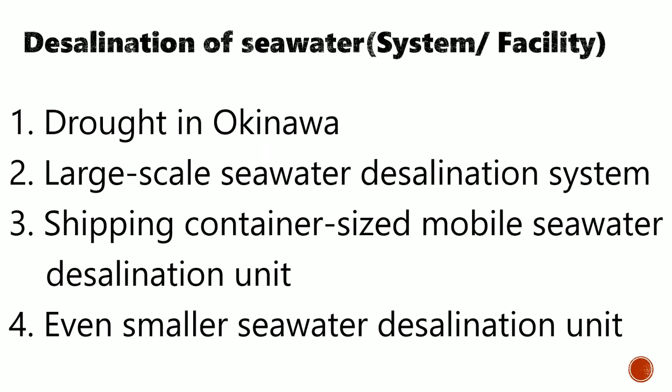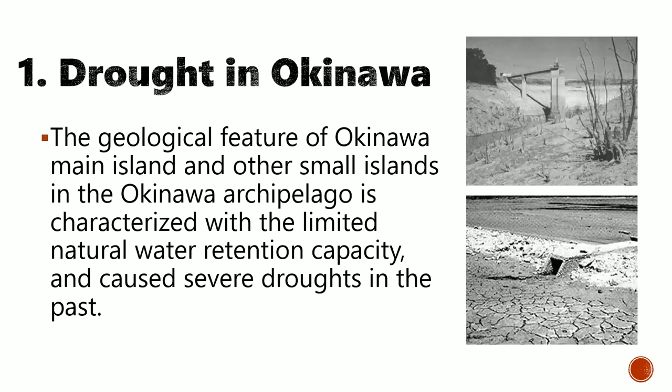1. Drought in Okinawa. The geological feature of Okinawa main island and other small islands in the Okinawa archipelago is characterized by limited natural water retention capacity, which caused severe droughts in the past. When the population was small, natural springs and wells at various parts of the region used to be sufficient to provide enough water.

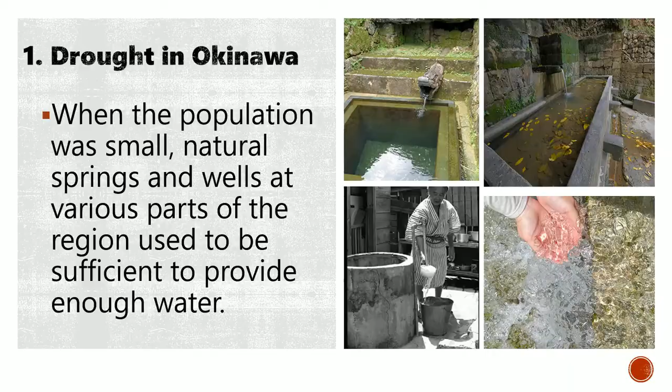However, the population of Okinawa steadily grew over the past. It was 167,000 in 1873, 572,000 in 1920, 1,107,000 in 1980, and 1,463,000 in 2022.

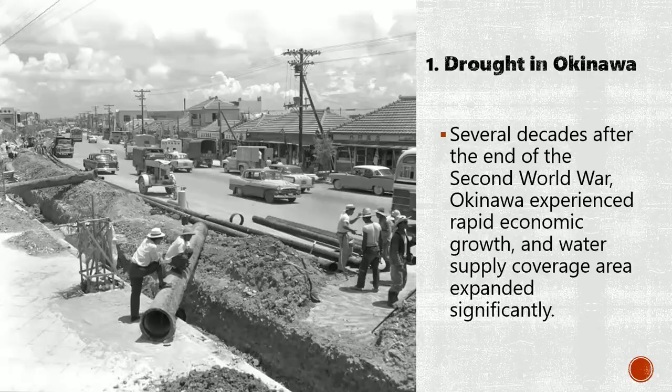Several decades after the end of the Second World War, Okinawa experienced rapid economic growth, and water supply coverage area expanded significantly. This resulted in increased water demand and chronic water shortage. There was even a year with almost no water supply throughout the summer.

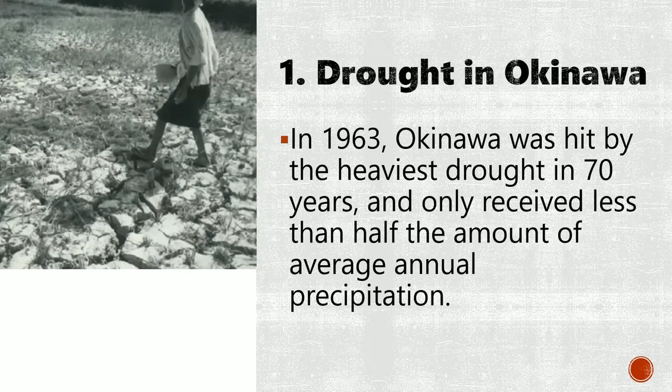In 1963, Okinawa was hit by the heaviest drought in 70 years and only received less than half the amount of average annual precipitation. The drought inflicted extremely serious damage to agricultural crops and even got the Japanese central government's attention. Extensive damage resulted in not only a long 206-day-long water supply restriction, but also crop loss, abnormal growth of insect pests, and starvation death of livestock.

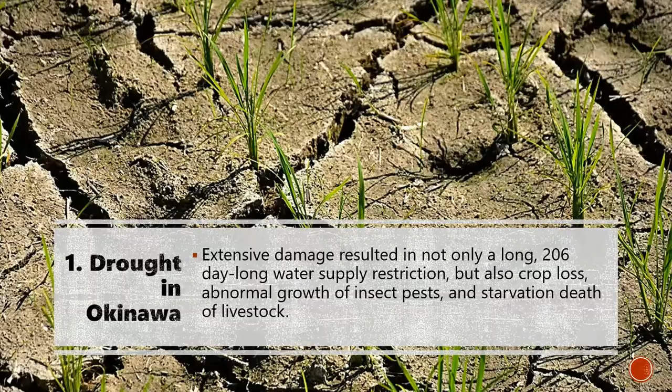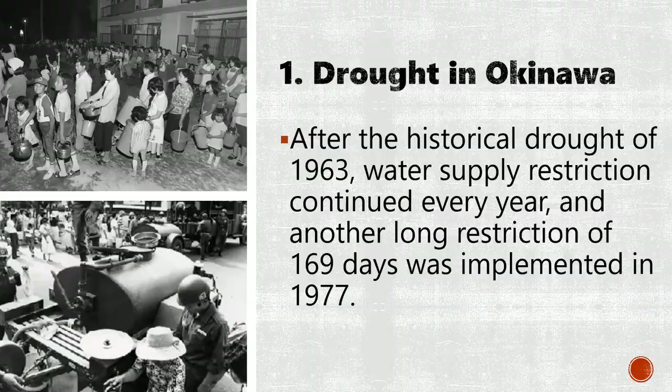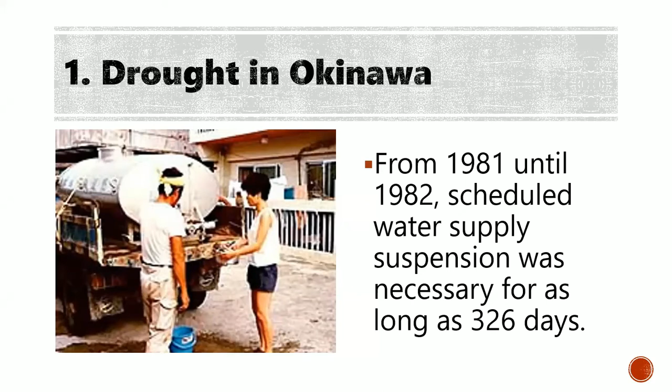After the historical drought of 1963, water supply restriction continued every year, and another long restriction of 169 days was implemented in 1977. From 1981 until 1982, scheduled water supply suspension was necessary for as long as 326 days. As you can see, there was a time when drought was a constant cause of worry in Okinawa.

Water use per person in Okinawa gradually increased year by year. Water demand further increased due to population growth, tourist growth attracted by booming tourism industry, and new resort hotel openings.

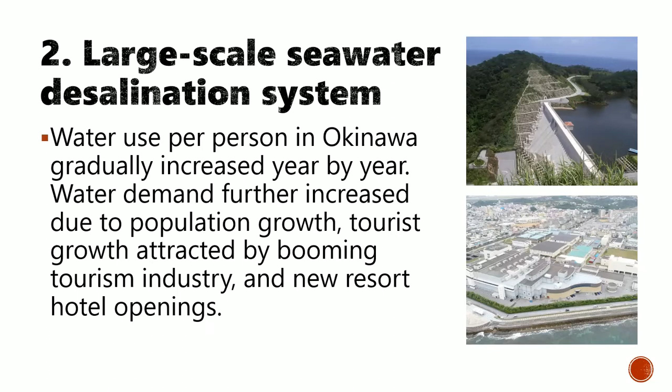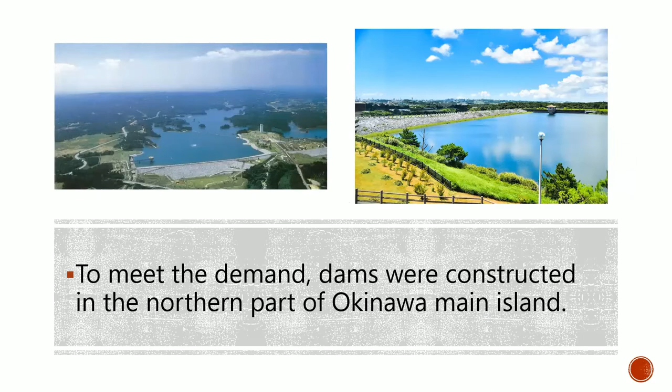To meet the demand, dams were constructed in the northern part of Okinawa main island. In addition, in preparation for the time of low water level in dams during drought year, a seawater desalination plant that can turn seawater into fresh water was constructed.

How to produce fresh water from seawater? Seawater has a salinity of about 3.5%. The technology of removing the dissolved salt to produce fresh water is called seawater desalination. The core of this technology is the cylinder called reverse osmosis membrane element.

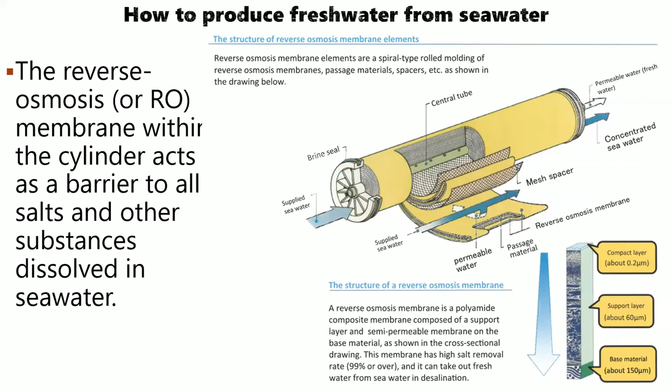The reverse osmosis, or RO, membrane within the cylinder acts as a barrier to all salts and other substances dissolved in seawater. By applying high pressure on seawater, only water molecules are forced through the membrane, thereby producing fresh water.

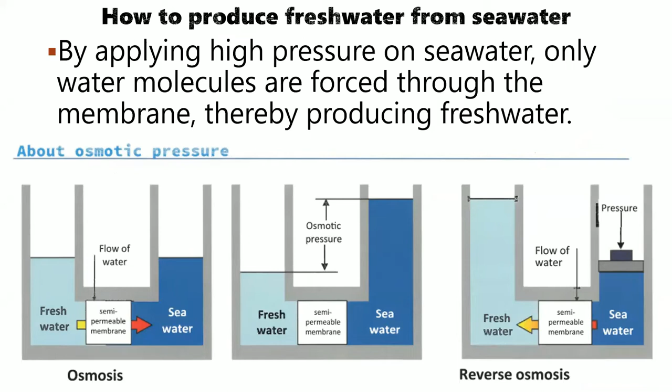Advantages of seawater desalination are as follows. 1. Stable production, securing water regardless of season or weather. 2. Shorter construction period relative to dams. 3. Smaller site area relative to dams. 4. Proximity to demand centers.

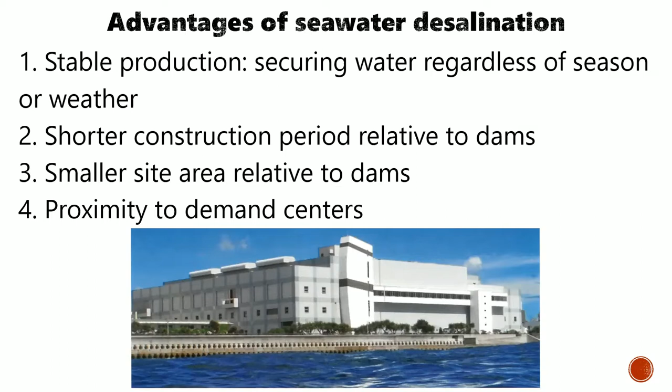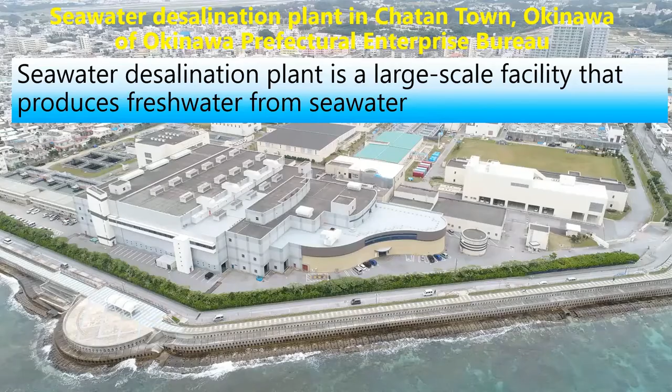Seawater desalination plant in Chatan Town, Okinawa, of Okinawa Prefectural Enterprise Bureau. Seawater desalination plant is a large-scale facility that produces fresh water from seawater. It has a production capacity of 40,000 cubic meters of fresh water per day, enough to fill a 25-meter swimming pool 160 times.

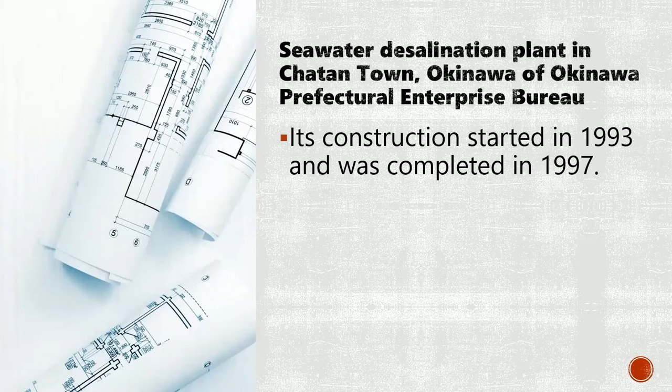The new water resource development project of introducing a seawater desalination plant began in 1977. Its construction started in 1993 and was completed in 1997.

Seawater desalination process at Chatan Seawater Desalination Plant. 1. Water intake: seawater is taken from an intake tower located near the desalination plant at a depth of 9 meters. 2. Sedimentation basin: remove sand and stones after letting them settle on the bottom. 3. Sand filters: remove fine sand, dirt, and turbid matter that came through the sedimentation basin.

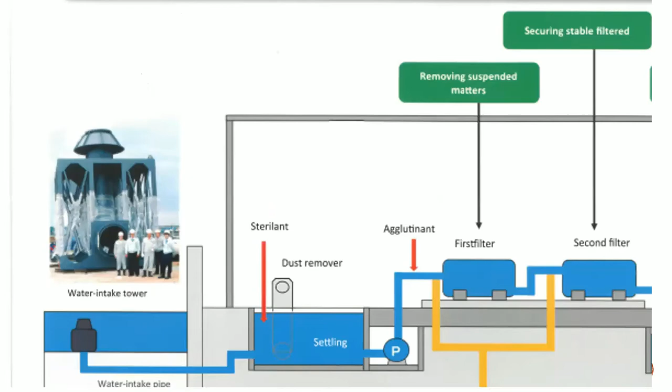4. Adjustment tank: temporarily store the filtered seawater. 5. Reverse osmosis unit: separate feed seawater into brine, or seawater with high concentration of salt, and freshwater. 6. Discharge brine to the sea from the discharge tower; meanwhile, send freshwater to Chatan Water Purification Plant. 7. Blend the freshwater from the desalination plant with purified water at the purification plant and supply to consumers.

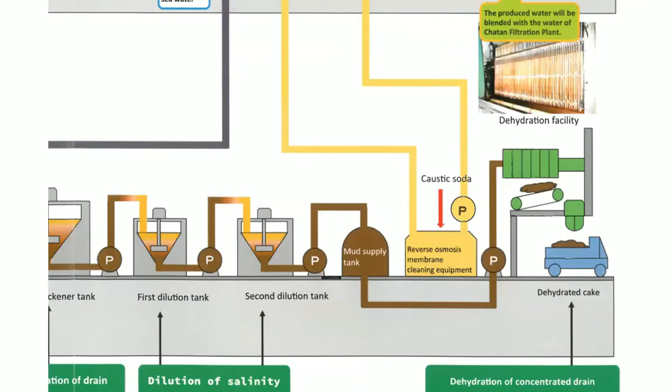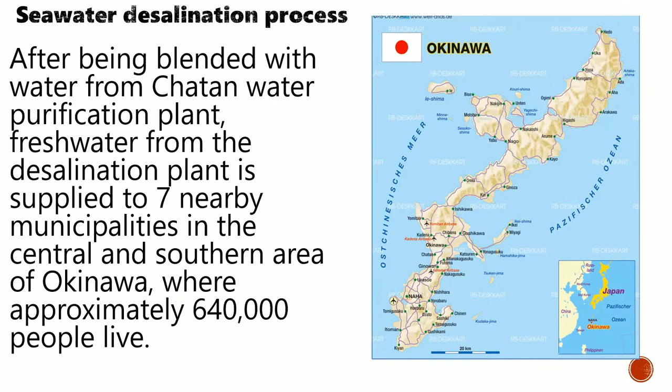After being blended with water from Chatan Water Purification Plant, fresh water from the desalination plant is supplied to 7 nearby municipalities in the central and southern area of Okinawa, where approximately 640,000 people live. Those municipalities include Chatan Town, Okinawa City, Kita Nakagusuku Village, Urasoe City, and Naha City.

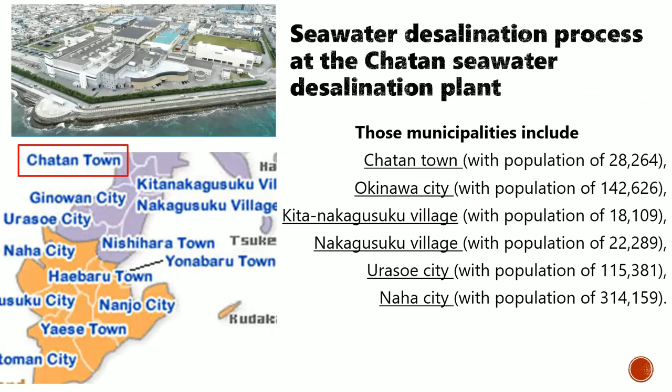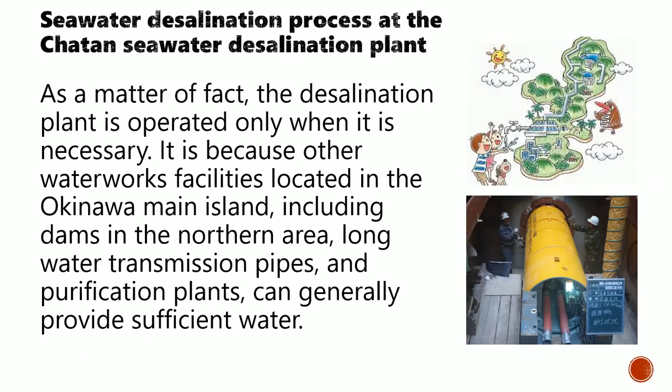As a matter of fact, the desalination plant is operated only when it is necessary. This is because other waterworks facilities located on the Okinawa main island, including dams in the northern area, long water transmission pipes, and purification plants, can generally provide sufficient water. Therefore, the desalination plant is operated at minimum capacity for maintenance purposes. It only operates at its full capacity when the water level of dams goes down. At full operation, the desalination plant requires about 9,000 kilowatts of electricity.

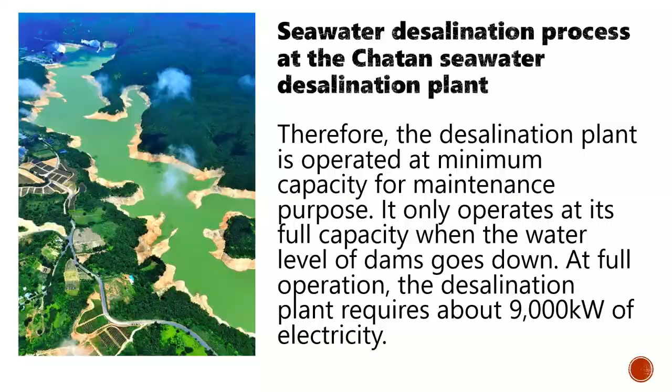Since the completion of the Chatan seawater desalination plant in 1997 until now in 2022, thanks partly to this facility, no water supply restriction was implemented in Okinawa main island.

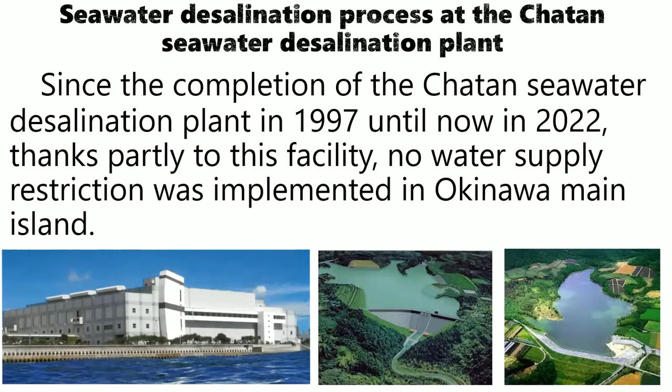Three. Shipping container-sized mobile seawater desalination unit.

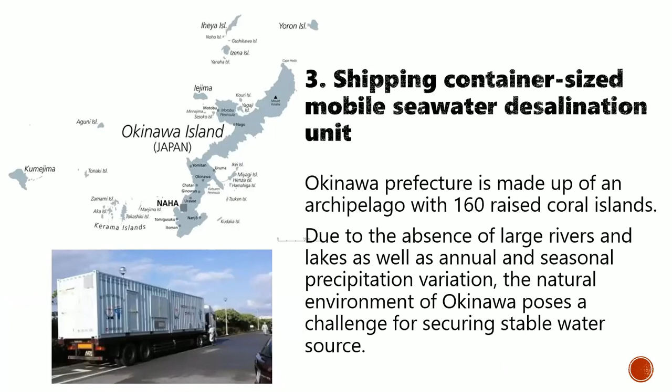Okinawa Prefecture is made up of an archipelago with 160 raised coral islands. Due to the absence of large rivers and lakes, as well as annual and seasonal precipitation variation, the natural environment of Okinawa poses a challenge for securing stable water sources. Remote islands in Okinawa Prefecture especially face many difficulties for stable water supply, including water supply restrictions due to droughts and securing emergency water supply.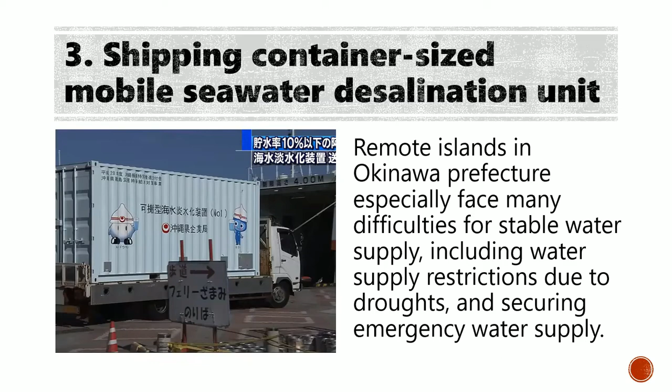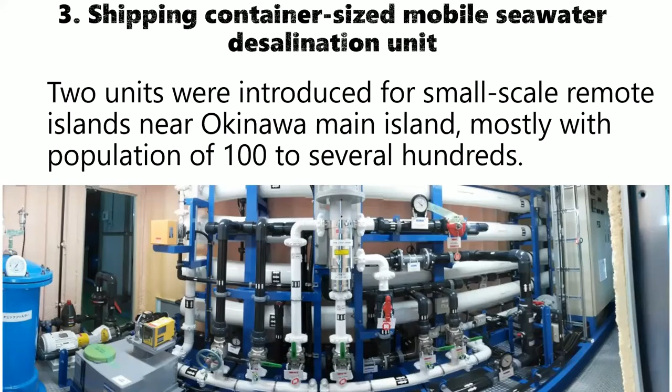To resolve these issues, Okinawa Prefecture introduced a mobile-type seawater desalination unit in 2016. Two units were introduced for small-scale remote islands near Okinawa main island, mostly with a population of 100 to several hundred. These units have the shape of a 20-foot-long container and can be transported to these islands by trailer and ship. The Okinawa prefectural government put them on standby to be ready to lend to these islands.

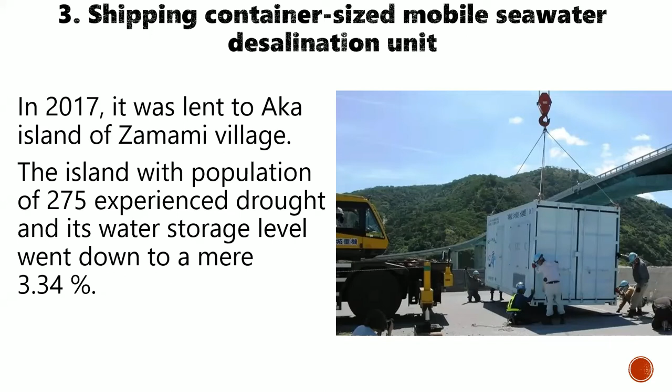In 2017, it was lent to Aka Island of Zamami Village. The island, with a population of 275, experienced drought, and its water storage level went down to a mere 3.34%. The unit produced about 100 tons of fresh water per day, and the water was supplied to Aka Island and neighboring Geruma Island. These islands are connected by a bridge, and water is supplied through bridge-mounted pipes. The desalination unit was able to meet the water demand of 300 residents and 100 to 200 tourists.

The mobile desalination unit was lent to Minami Daito Island in 2020 as well, when its own seawater desalination unit failed. The island has a population of 1,418 and is located 400 kilometers to the east of Okinawa main island. Thanks to the prompt response of staff members and those involved, transportation to supply resumption was implemented at an astonishing pace and only took 3 days.

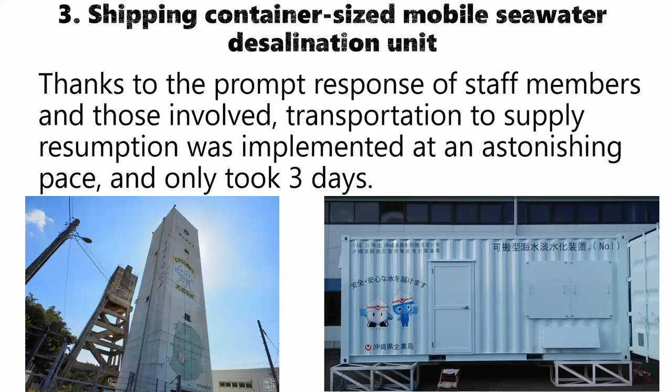Here are the specifications of the shipping container-sized mobile seawater desalination unit.

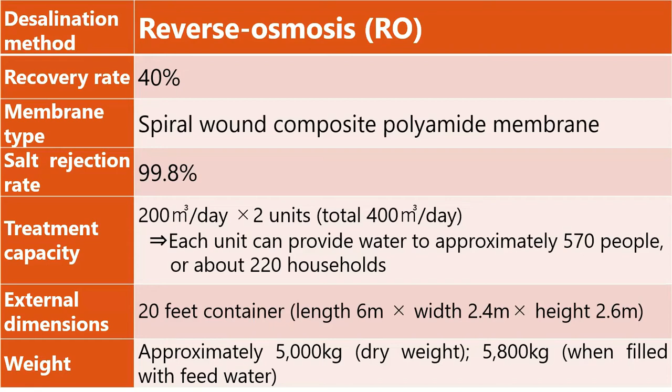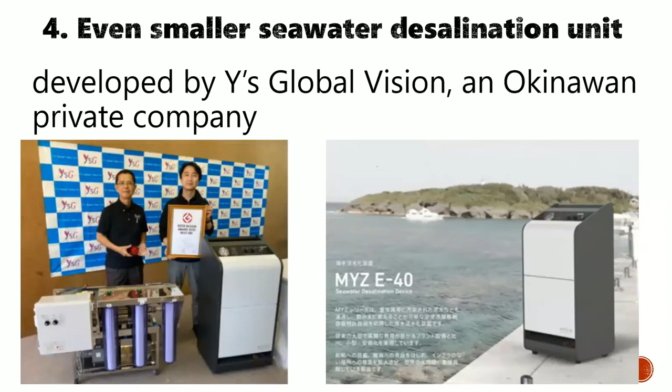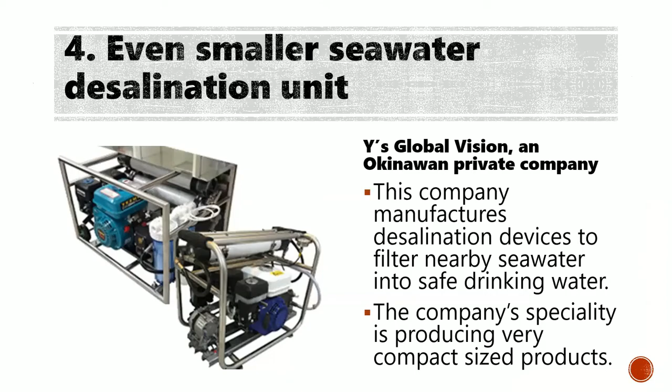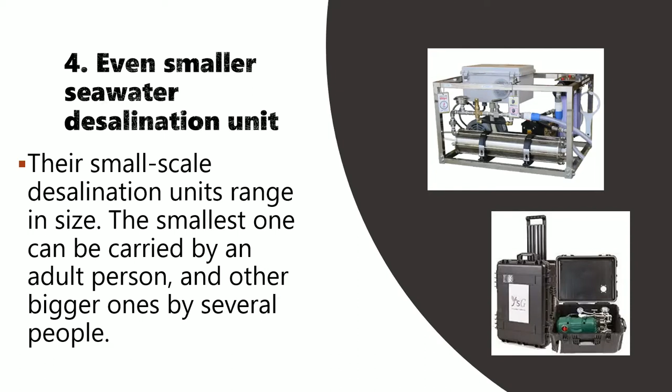Four. An even smaller seawater desalination unit, developed by Y's Global Vision, an Okinawan private company. This company manufactures desalination devices to filter nearby seawater into safe drinking water. The company's specialty is producing very compact-sized products. Their small-scale desalination units range in size. The smallest one can be carried by an adult person, and other bigger ones by several people.

Mr. Omine, the developer, focused his research on desalination units that enable self-sufficient water supply in remote islands, communities, and households without depending on water supply from large purification plants. It was a theme rarely pursued by manufacturers at that time.

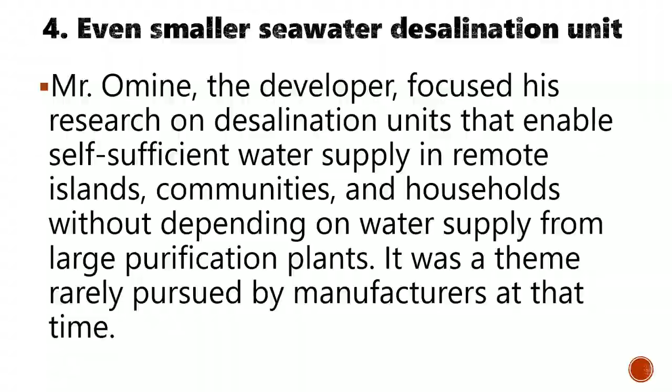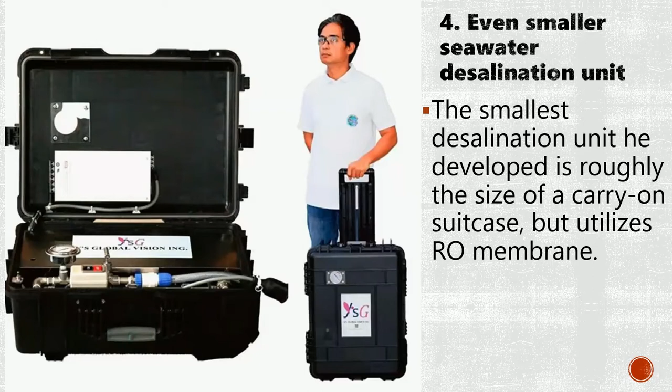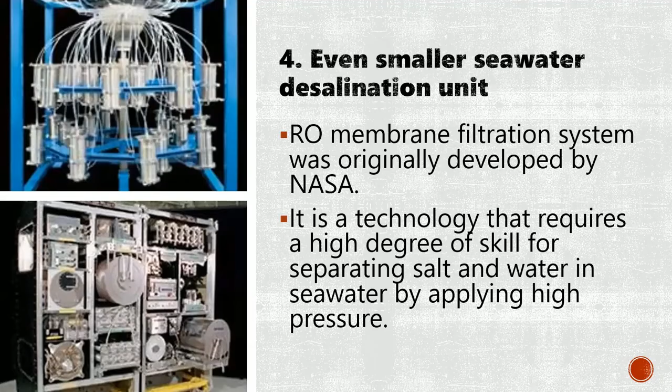The smallest desalination unit he developed is roughly the size of a carry-on suitcase, but utilizes RO membrane. RO membrane filtration system was originally developed by NASA. It is a technology that requires a high degree of skill for separating salt and water in seawater by applying high pressure. Such intricate technology naturally required a large-sized structure at that time. That is why most desalination plants worldwide were large-scale plants.

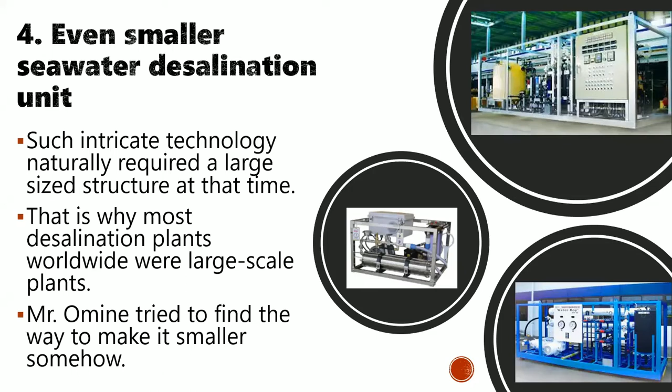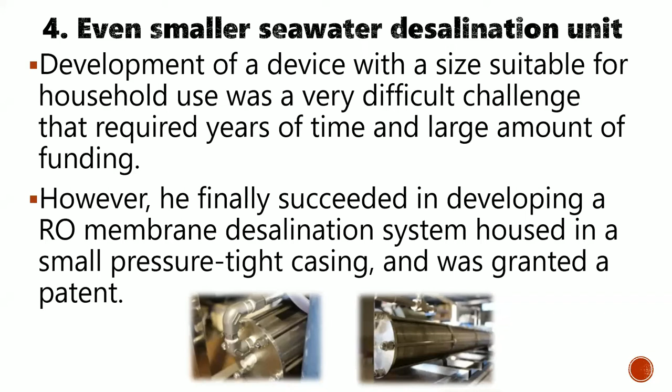Mr. Omine tried to find a way to make it smaller somehow. Development of a device with a size suitable for household use was a very difficult challenge that required years of time and a large amount of funding. However, he finally succeeded in developing a RO membrane desalination system housed in a small pressure-tight casing and was granted a patent.

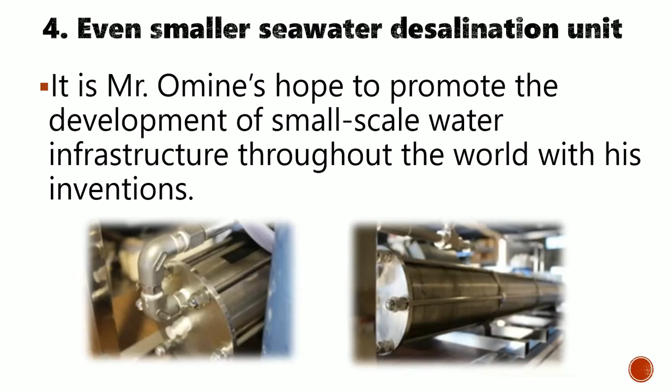It is Mr. Omine's hope to promote the development of small-scale water infrastructure throughout the world with his inventions.

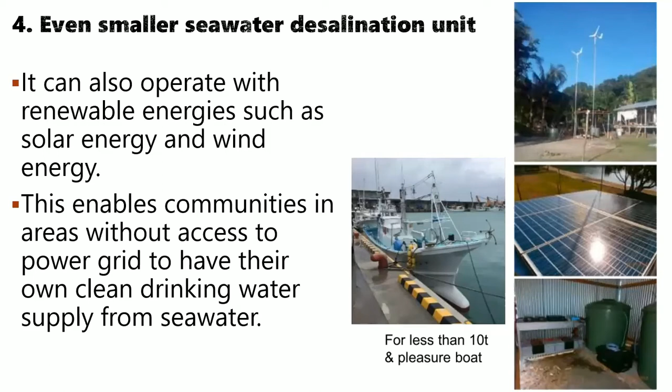Another device that he designed can be powered by electricity through domestic electrical outlets. It produces 1 ton of fresh water from seawater per day. It can also operate with renewable energies, such as solar energy and wind energy. This enables communities in areas without access to the power grid to have their own clean drinking water supply from seawater.

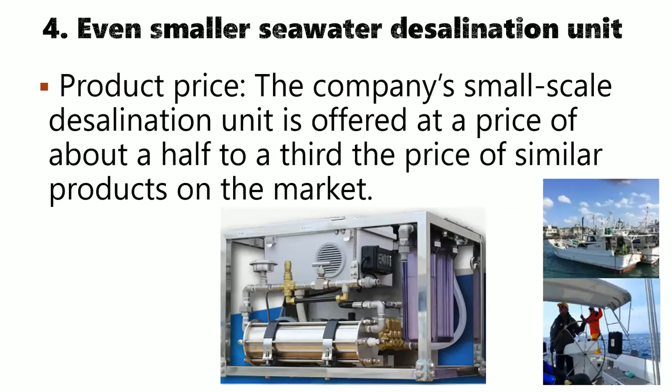Regarding the product price, the company's small-scale desalination unit is offered at about half to a third the price of similar products on the market.

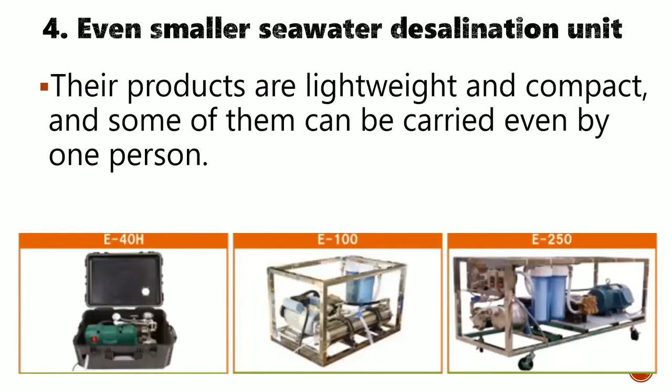Their products are lightweight and compact, and some can be carried by one person. One product, the MYZ E60, can be transported in a vehicle's cargo space.

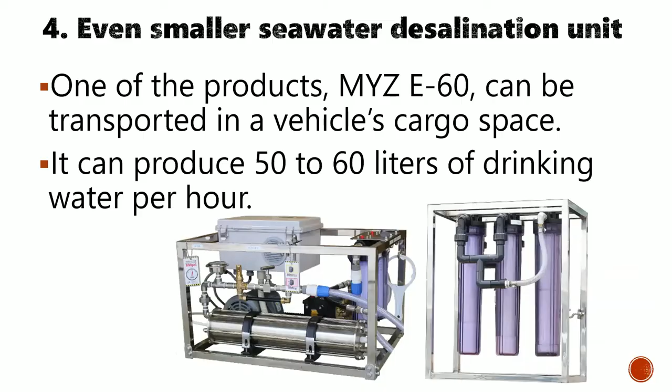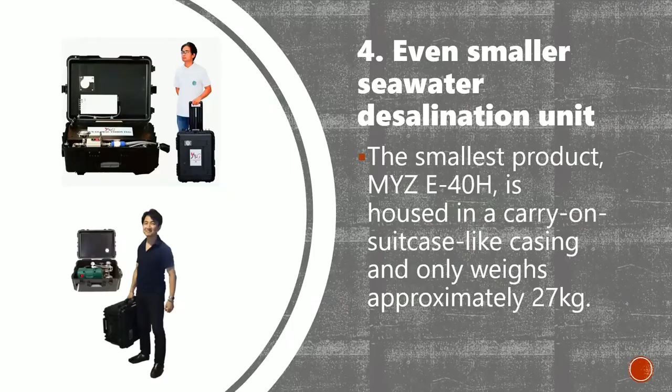The smallest product, MYZ E40H, is housed in a carry-on suitcase-like casing and weighs approximately 27 kilograms. It can produce 40 liters of drinking water per hour from seawater.

The company has shipping records to more than 10 countries. In Papua New Guinea, the company's desalination unit is in operation with renewable power sources such as wind and solar energy.

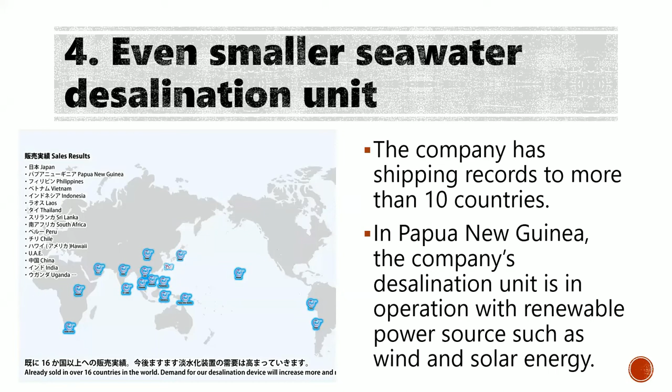Thanks to its small size, the company's desalination unit can be installed for overwater bungalows individually. Places with limited access to water sources or stores to purchase water, such as construction sites, can benefit from this product for temporary water supply. With this product, fresh water can be obtained without water taps nearby.

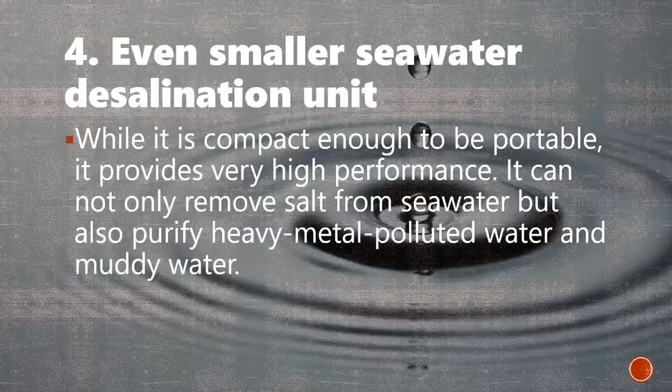While it is compact enough to be portable, it provides very high performance. It can not only remove salt from seawater, but also purify heavy metal polluted water and muddy water. Even with its purification ability meeting the Japanese water quality standard, the desalination unit is essentially a universal water purifier.

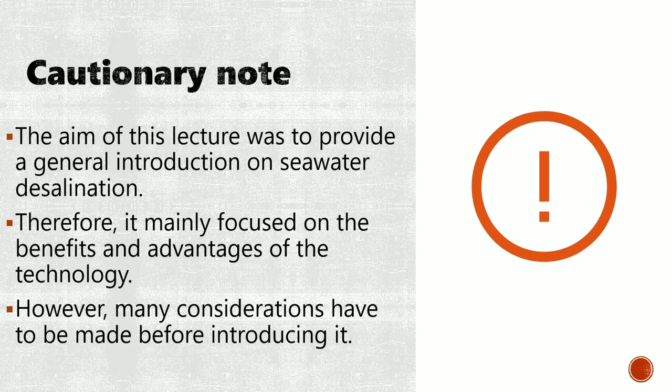Cautionary note: the aim of this lecture was to provide a general introduction on seawater desalination. Therefore, it mainly focused on the benefits and advantages of the technology. However, many considerations have to be made before introducing it. Seawater desalination is not necessarily a solution for everyone.

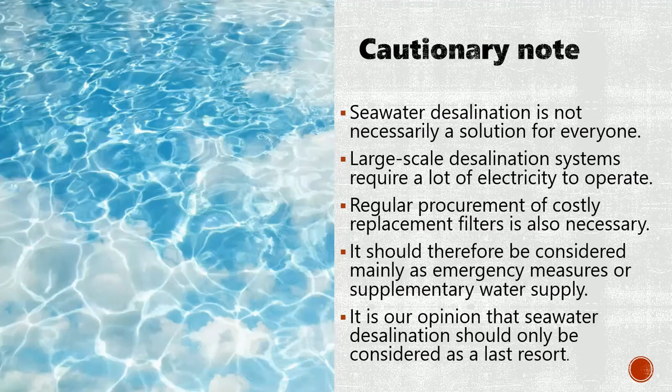Large-scale desalination systems require a lot of electricity to operate. Regular procurement of costly replacement filters is also necessary. It should therefore be considered mainly as an emergency measure or supplementary water supply. It is our opinion that seawater desalination should only be considered as a last resort.

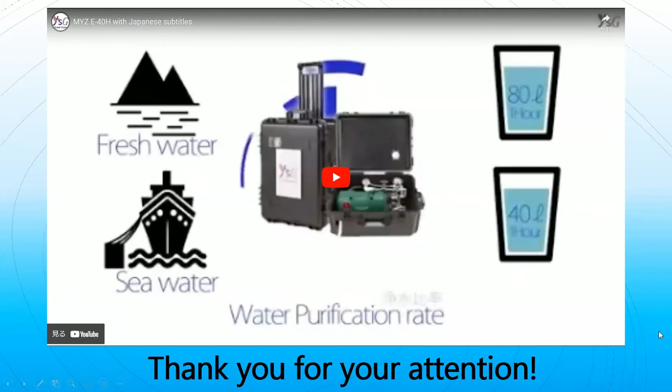Seawater desalination equipment, E40H. Compact and high performance. Easy to carry, easy to use. 40 liters per hour, or 10.5 gallons per hour.

Remove the tubes, primary pump, and sediment filters from the case. Secure the connection between the water intake tube and the pump. Secure the connection of the brine outlet tube to the pressure valve. Prepare the tubes, pump, and sediment filter for use.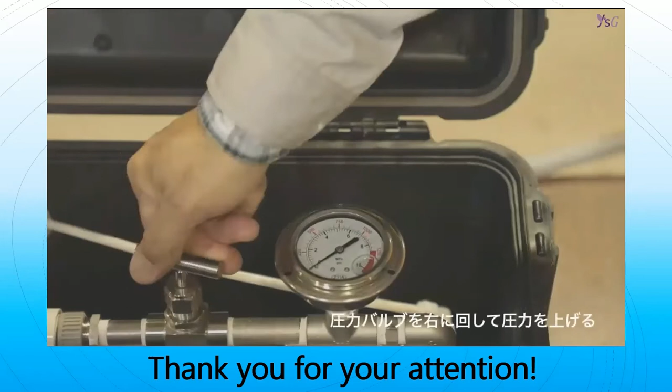Secure the connection of the two output plugs to the power source or generator. Recheck that all the connections are correct. Start the E40 by turning the red knob clockwise. Slowly increase the pressure by turning the pressure valve clockwise. Stop turning when pressure reaches 800 psi or 5.5 MPa.

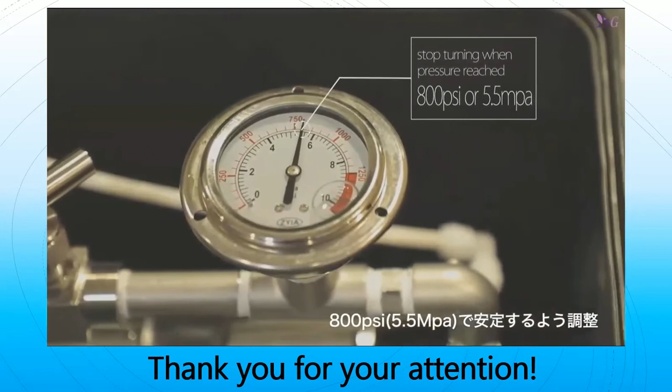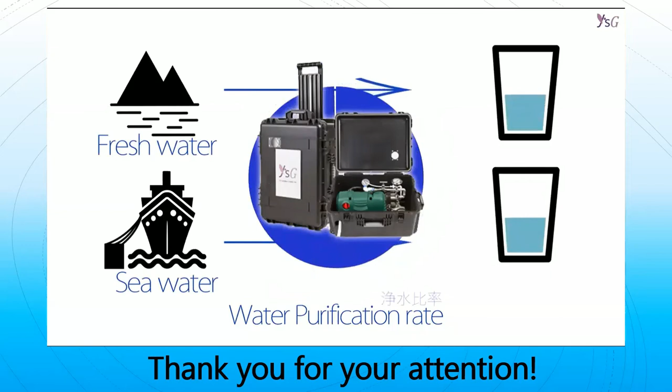This seawater has 3.4% salinity. The water purification rate for freshwater is 80 liters per hour. The rate for seawater is 40 liters per hour. After purification, the salinity is 0%.

After purification, the seawater is drinkable. The continuous operation time is 1 hour. It can be used again after 30 minutes.

The E40 can be used in emergencies such as earthquakes, typhoons, droughts, and many others.

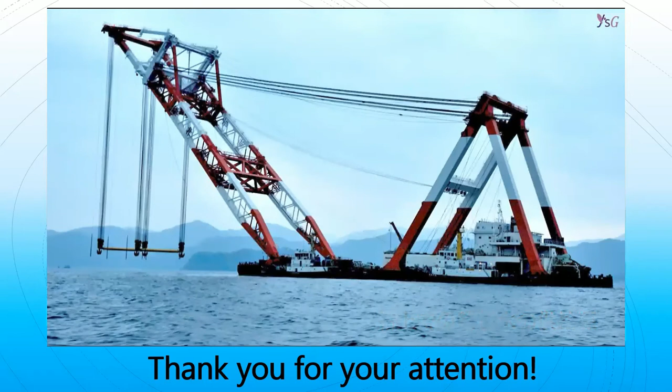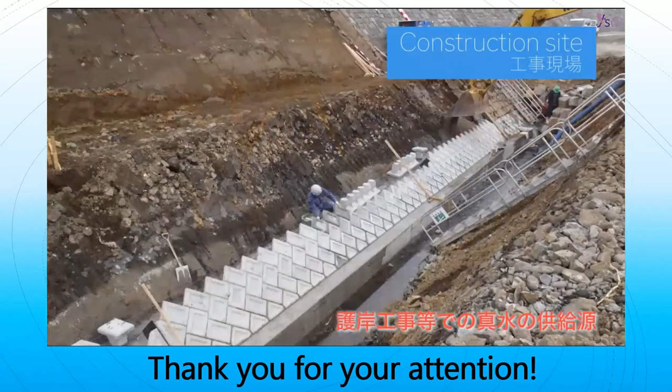It can be used as a water source for international cruise ships. It can be used at construction sites where fresh water for concrete is difficult to obtain. It can be used as a water source for remote islands where the water supply is unreliable. It can be used on farms as drinking water for livestock, or fresh water when rainfall is unavailable. It can be used at resort hotels. It can generate water for large-scale facilities.

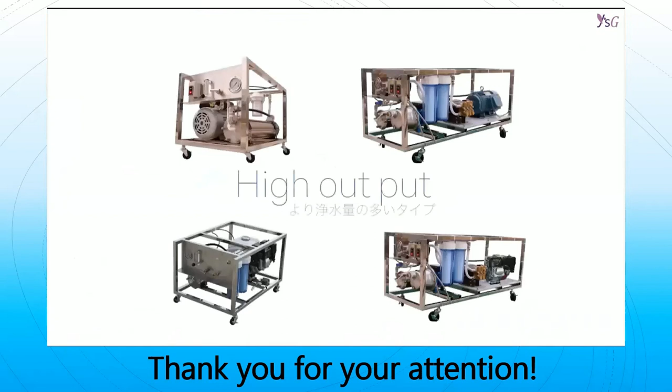There are more models for higher scale operations. The E series runs on electricity, and the GX series runs on gasoline.

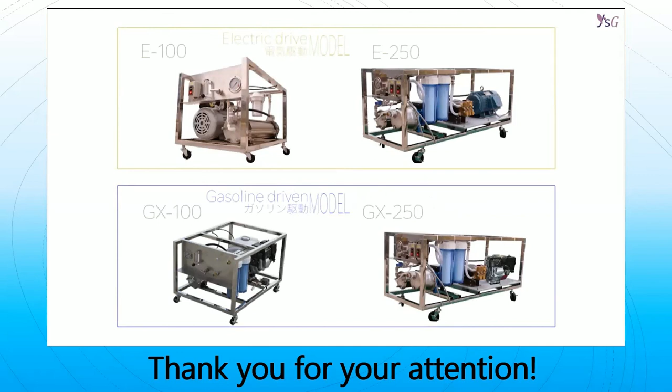Emergency use water purifier, Water Pure and Water Pure Pro. Fresh and safe drinking water out of the river. Does not need batteries for operation and is easy to use. Lightweight and easy to carry. Eliminates 99% of harmful matter.

Household use water purifier, Pitcher Pure. Drink antioxidant water daily for good health and beauty. Very good cost performance, about 6 yen per liter. Good purification, removes more than 80% of radioactive substances.

Silica Pure promotes metabolism and has a compact size. You can use it at the office, outside, and in a variety of scenes. You can absorb silica just by drinking water.